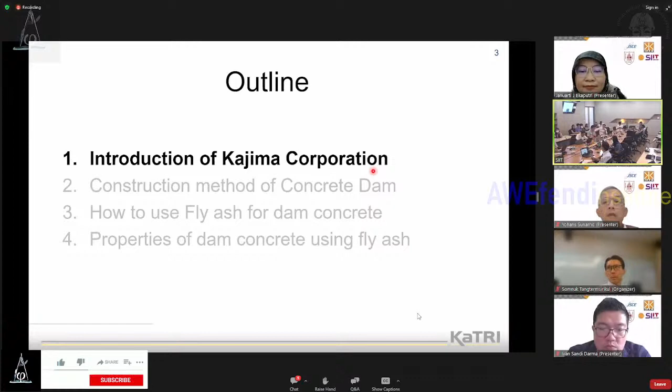So a brief introduction of Kajima Corporation: the headquarters of my company is in Tokyo, Japan. Just a moment. Can you see the slide? Anyone, please? No? Okay, that's okay. So my company... okay. So the headquarters of my company is Tokyo, Japan, and our business includes civil engineering construction division, construction, real estate development, design engineering, and so on.

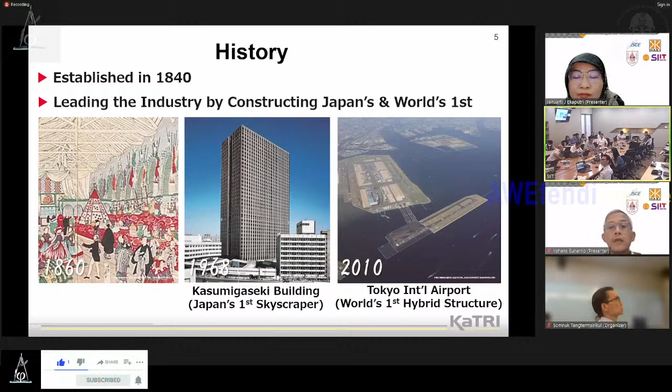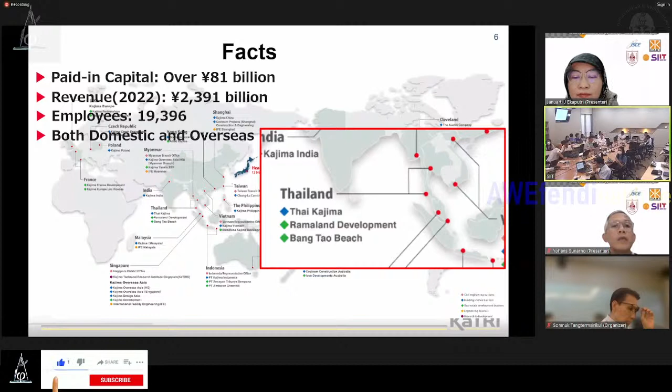This slide shows the history of my company. Kajima Corporation was established in 1840, and our mission is leading the industry through construction in Japan and at a world class level. Our paid capital and revenue are shown on this slide, and we have employees of almost 20,000 people, a number that includes both domestic and overseas staff. In Thailand, Thai Kajima is a group company of ours. Our company covers all phases of a project, not only construction, but from early planning and design to maintenance, all phases are our company's work.

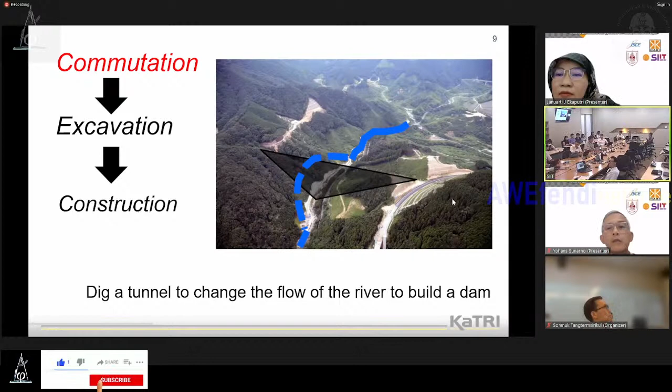Then, first I introduce the construction method of the concrete dam. This figure shows a dam construction site. I worked at that site, a dam construction site, for 3 years, doing quality control of the concrete. So the river flows along these lines, and the black triangle is the dam construction site. It is impossible to construct a dam in the riverbed, so we dig a tunnel first and change the flow of the river, and then we construct the dam site. This is called diversion. After diversion and excavation of the rocks, concrete construction is started.

At the dam, the concrete is separated into almost two areas. One is the outer part, durable concrete, which is cast because this area is the surface area, so compressive strength and durability are required. On the other hand, the inner part of the concrete does not require much compressive strength, so the most important thing is reducing heat generation.

For example, for big dams, RCD, roller compacted dam concrete, is used in Japan. For dams with a height over 50 meters, we use RCD concrete as the internal part of the dam concrete. The strength of this concrete is very hard.

The water cement ratio, or water binder ratio, is 65 to 80% almost, and the unit weight of binder is about 120 kilograms per cubic meter. So the dam RCD concrete is very hard.

We transport it by dump truck like this, then spread it with a bulldozer to almost 1 meter height at one layer. So many layers are spread in the dam concrete.

At my work site, my dam is about 100 meters in height, so 100 layers are spread in the concrete dam.

And then, how to use fly ash for dam concrete. As mentioned, this slide shows the quality standard of fly ash, the Japanese Industrial Standard JIS. The SiO2, moisture, loss, density, fineness, flow, and activity index - these target values are decided under this standard in Japan.

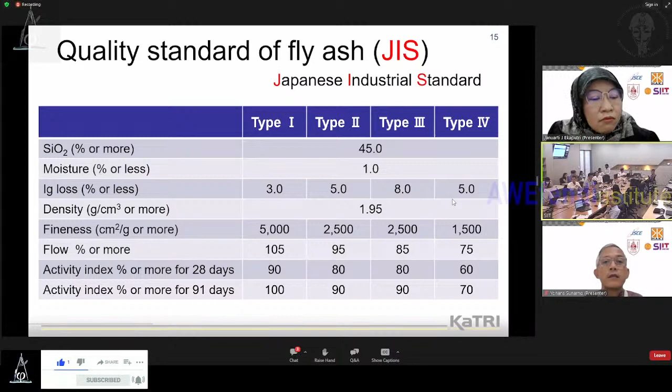Fly ash is separated into 4 types, and almost all dam concrete uses type 2 fly ash. In addition, most construction sites, beyond the JIS standard, have detailed rules for fly ash decided.

For example, this slide shows my experience at a dam site, such as the specification document for dam construction. For a specification document regarding fly ash quality, target values and allowable fluctuation ranges must be set for the following items, such as SiO2, loss, and fineness.

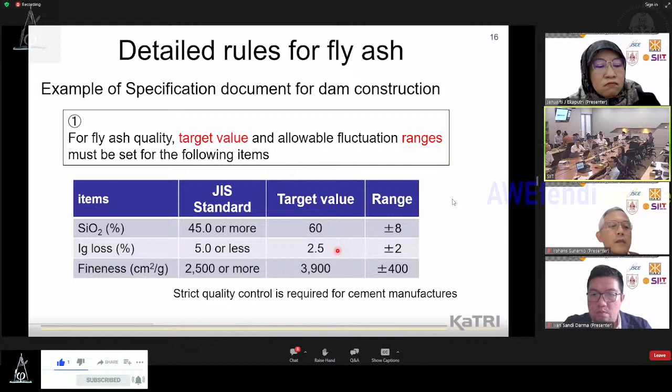The JIS standard value is here, but we are required to set the target value and the ranges. So it's very strict quality control required for our company, and also for a contractor or a cement manufacturer.

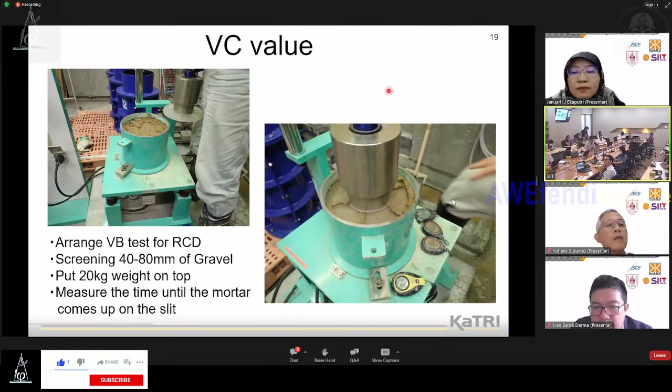This is the weight. We shake the lower table and measure the time until the mortar comes up to the slit. This is the VC value test. So we estimate the quality, the fresh property of the dam concrete, with these tests.

This slide shows comprehensive long-term compressive strength development of dam concrete. As many people researching fresh concrete know, this shows an explanation of number A and number B2.

These concretes are the same in maximum size of gravel, type of cement, slump, and air content. Only the water by binder ratio is changed.

We often estimate compressive strength at 91 days, and as you know, from 91 days the compressive strength increases for 2 years and more. And when the water by binder ratio is high, the increase is higher.

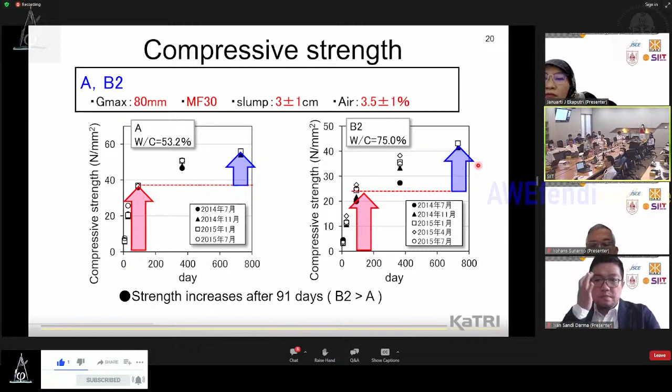So that is consideration. Compressive strength of dam concrete using fly ash increases over several years, but temperature rise of the concrete converges over 14 days. That is consideration. So we try to study about the real adiabatic temperature rise of dam concrete using this equipment.

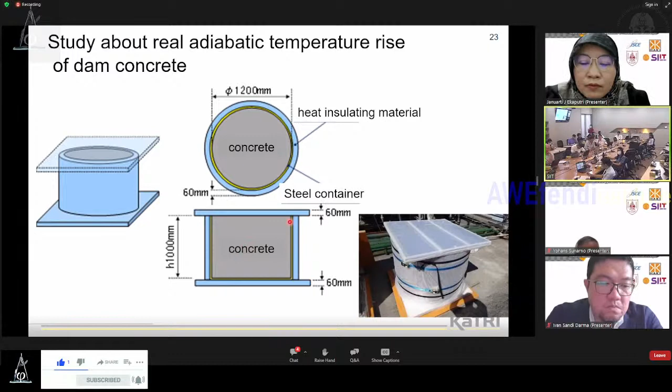The heat insulating materials, the steel container, and the concrete - we put the concrete and seal it and measure the inside concrete temperature, and then we try to simulate this equipment in the thermal analysis. We get this adiabatic temperature rise of fly ash concrete.

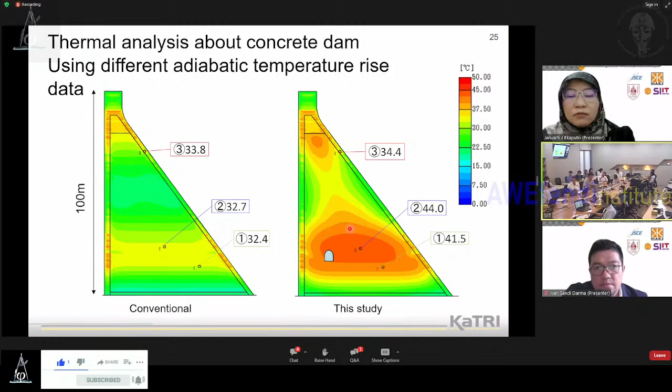The inspection gallery is here, and cracks I have never seen occurred at this area. That may be due to the low heat, but the construction speed is very high, so concrete is covered. Because of that, temperature is trapped inside, I think.

So that's the conclusion of my presentation. In Japan, fly ash is used under strictly controlled concrete dams, and the compressive strength of concrete using moderate heat fly ash cement increases over the long term. This is most likely known. But if construction speed increases and heat radiation is reduced, heat may accumulate in the dam. So I think so. That's the end of my presentation. Thank you for your attention.

Good afternoon everybody, thank you for the chance given to me to present my presentation. I am lucky today to represent the concrete industry from Indonesia and share in this forum.

I am from practitioner background. Now I am a director from PT Bosowa Beton, which is a ready mix and precast company from Indonesia. Bosowa is a national company, a subsidiary of Bosowa Corporation group, which has a large business in the eastern region of Indonesia. Our city is Makassar.

With our vision of becoming the best and largest ready mix and precast company in Eastern Indonesia, we will always provide the best product with excellent quality and service. Our commitment is to always innovate in developing high quality and environmentally friendly products, adhere to sustainability practice, and actively strive to reduce our impact on the environment.

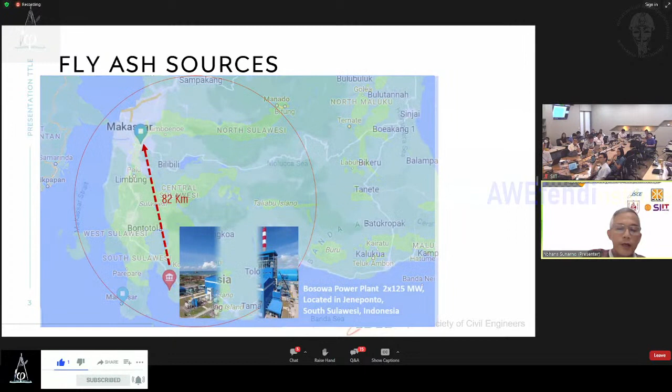First, we use fly ash for our concrete. That fly ash is sourced from the Jeneponto power plant in South Sulawesi, Indonesia, on Sulawesi Island. The power plant has a capacity of 2 times 125 megawatts, located in Jeneponto Regency, South Sulawesi, Indonesia, at a distance of about 82 kilometers from Makassar city, where our factory is located.

Now for the characteristics of fly ash. Based on the fly ash sample characterization from test data, there are several important mineral contents in fly ash that indicate the type or class of fly ash. From this characterization test, we can see that this class of fly ash is Class F, because the total of silicon dioxide, aluminum oxide, and iron trioxide is more than 70%. This is the classification we use for our factory in Makassar.

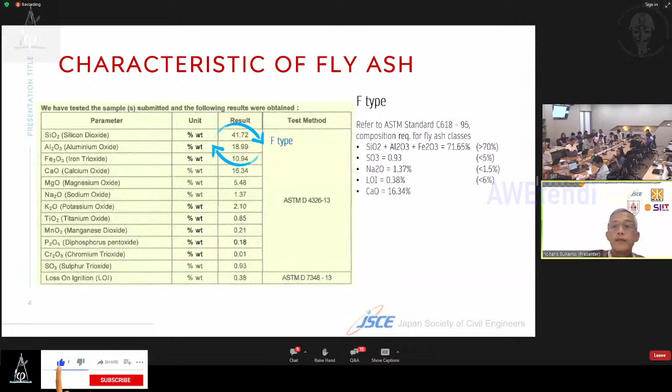We have already been using fly ash for about 10 years, starting with fly ash from this factory. So if we talk about the benefits of fly ash usage in the concrete industry, there are three aspects we can consider regarding the benefits of fly ash usage.

The first is the technical aspect. In technical terms, the following are the benefits of fly ash in concrete, both in fresh concrete and hardened concrete conditions. In the fresh concrete condition: improved workability, decreased bleeding, reduced segregation, and low heat of hydration. In the hardened concrete condition: improved strength and durability, permeability, corrosion resistance, and self-healing.

The second benefit can be seen from the economic aspect. We get the following benefits: first, we can reduce the cement cost. Cement is the largest component of the material cost of concrete production, so by utilizing fly ash as a supplementary cementitious material, where generally the price of fly ash is cheaper than the price of cement, the greater the percentage of fly ash used, the cheaper the cost of concrete material.

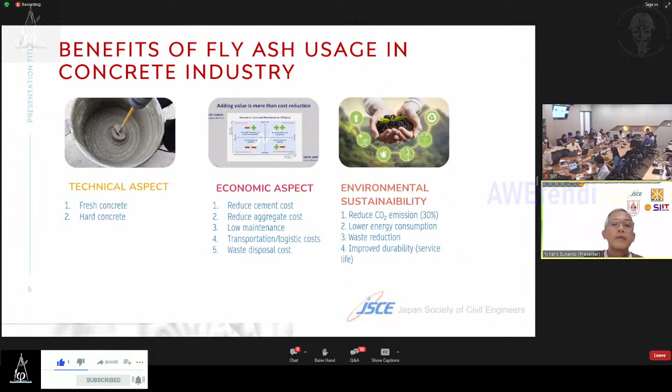So that's about the technical aspect. We have some advantages with the use of fly ash. The first is improved workability.

So it increases, as we can increase the slump result of fresh concrete. In our product, some concrete that uses high volume fly ash concrete behaves like self-compacting concrete. So the slump is very high. This makes it easy for casting the concrete on site.

Second, decrease bleeding and segregation. So the physical characteristic of fly ash can improve the cohesiveness of fresh concrete.

The third, increased compressive strength. Fly ash causes lower initial compressive strength in concrete up to 28 days. But after 28 days, the increase in compressive strength continues until more than 120 days.

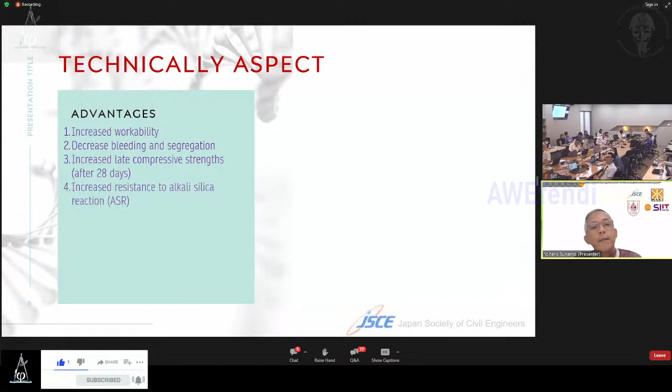The fourth, increased resistance to alkali silica reaction. Five, increased resistance to sulfate attack. So concrete with fly ash can anticipate conditions in a coastal area where the influence of seawater or sulfate attack can damage concrete performance.

6. Less heat generation during hydration. It's very helpful in mass pouring casting, where usually the thickness of the concrete is quite large, sometimes 1 or 1.5 meters. So in this condition, if there is a temperature difference, this can also be a problem, because in concrete, the hydration process increases the temperature of the concrete.

7, increasing pore refinement. And 8, decreased permeability. Fly ash particle size fills voids resulting in increased concrete density. So with fly ash usage, we can increase the density, so we can get concrete with higher density.

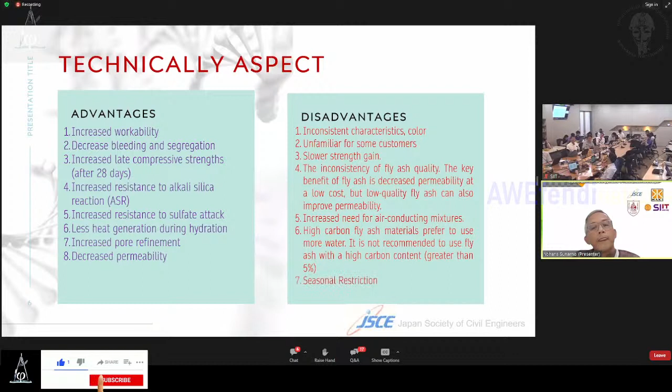In our current application now, we already use fly ash with a percentage of about 35 to 40%. So for retail projects, we always use fly ash content of about 35 to 40%, except if the project has special requirements.

The second application is for custom specification projects. Last year we had a project in our city with mass pouring of about 2,300 cubic meters. The name of the project is Sudirman Suite Tower. The pouring had to be finished within a maximum of 36 hours with grade FC 30 megapascal, and the temperature requirement was maximum 32 degrees Celsius. So in this concrete, we used fly ash at about 15%. And to minimize the temperature, we used ice, so the temperature stayed under control at less than 32 degrees Celsius.

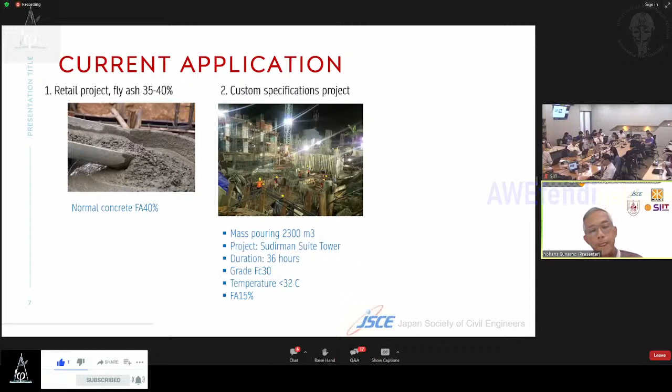In the next application, we now produce pre-stress piles that use high volume fly ash concrete. The pre-stress concrete grade is FC 45 megapascal, and it must be high early strength concrete because we need to release the steel cable before 24 hours.

Pre-stress production is limited by strength and time. Pre-stress concrete must reach a certain tensile strength so the steel cable can be released. The time required for release affects the speed of production. So when we use fly ash at about 50%, it causes the initial strength to be slow. In this condition, we do material engineering by adding a chemical admixture. For this product we use superplasticizer and an accelerator, because we have to reach a strength of 21 megapascal before 24 hours.

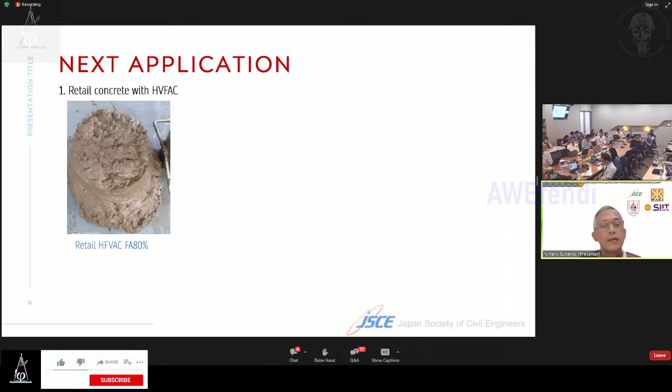Next, we are planning to produce railway sleepers with high volume fly ash concrete. We know the application of fly ash for rail sleepers has already been used in Australia and Japan with geopolymer products. In Indonesia, where the influence of the marine environment is very dominant, I think it's important to research the application of high volume fly ash concrete for rail sleepers. Our target is that next year we can already produce this product, the railway sleeper with high volume fly ash concrete.

The next item is cellular lightweight concrete with fly ash. We will try to use fly ash to replace cement, and we also use bottom ash to replace fine aggregate. With this product, we hope to get more efficiency and more cost savings on material cost.

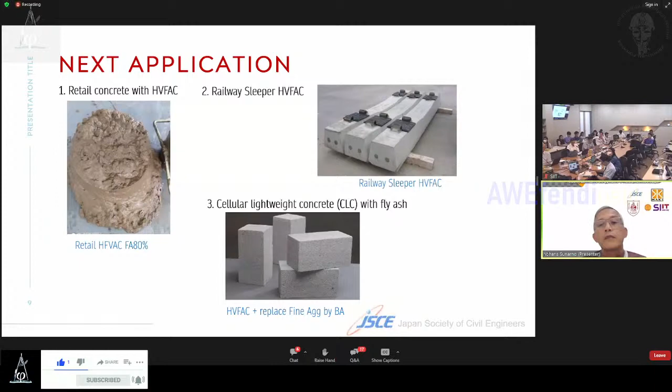So this is our summary: there are many opportunities for utilizing fly ash and bottom ash in Indonesia. Material engineering needs to be carried out so that quality requirements can be met. Proper handling of fly ash and bottom ash produces a concrete alternative with high performance, cheaper and environmentally friendly.

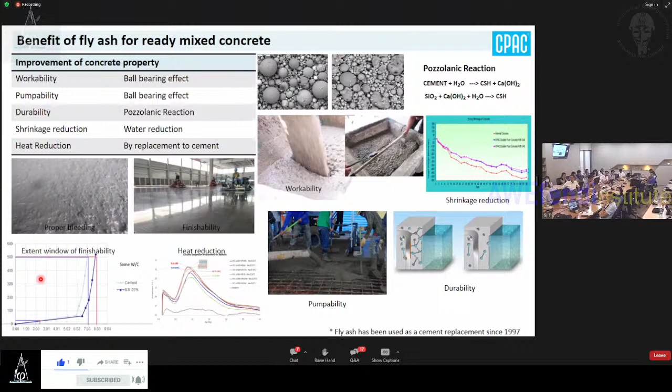For post tension, as I mentioned, in Thailand we use it for high-rise buildings, so we need some fly ash to give better quality pumpability of the concrete. And the bored pile, we prepare fly ash around 30 to 40%, even in underwater concrete work.

And if we talk about durable concrete, as I mentioned, for industrial floors we use around 20 to 25%. For sulfate resistance we use around 30 to 40%. For waterproof concrete as well, marine concrete, we use around 40 to 50%. For special cases like high strength concrete, self-compacting concrete, and low heat concrete, which today I'm going to give you some information on in detail, we use from 25% up to 60%.

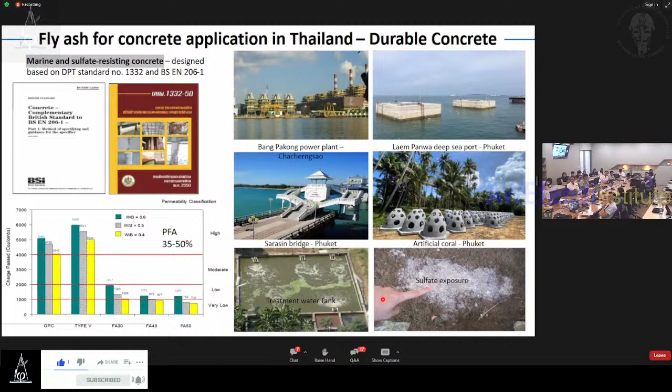Some water treatment tanks and some soil that have a sulfate condition. This is a benefit of fly ash for durability.

Also, as I mentioned, for floors and waterproof concrete, we found some effect from fly ash when the concrete cracks and is exposed to moisture in some moist environment. After that, it can heal itself when moisture comes to the structure. So that's the effect of fly ash as well.

So this one just wants to show you what applications we use. And for self-compacting concrete, it's used a lot in Thailand right now.

For thin shell structures like this, difficult for people to cast and difficult to vibrate the concrete, we use self-compacting concrete, even with congested reinforcement. This one is close to SIIT and Thammasat University, the expressway at Chiang Rak. I think Professor Smith was also involved in this project for casting self-compacting concrete.

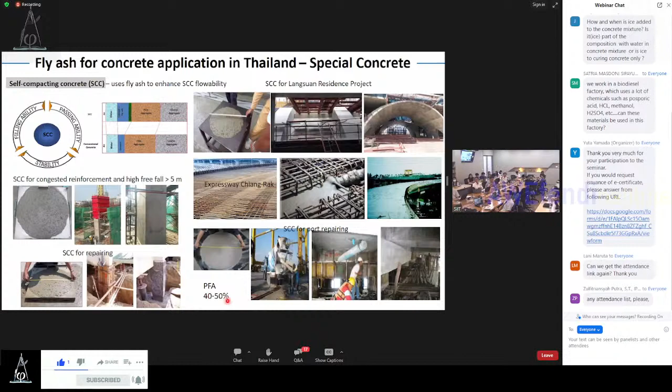And so on, many structures use fly ash for repairing. This one used around 40 to 50% to repair cement sheds, and it's used for high strength as well. I've seen it used for vertical members and also horizontal members like slabs.

We also tried to make a pump simulation for the concrete. You can see here the pump line, with a distance of about 600 meters. We pumped the concrete in and observed the concrete out with no problems when using fly ash like this. So there are many applications in Thailand where we use fly ash so far.

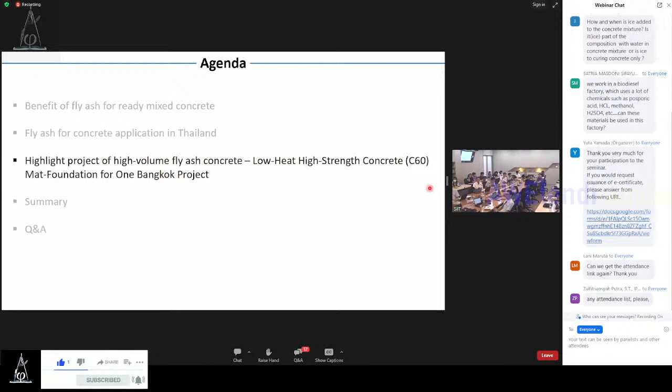Right now we generally use it for C60 high strength concrete in Thailand. Okay, this is some background of fly ash applications in Thailand, so this is the highlight I would like to give you information on, as I mentioned, we use fly ash for low heat concrete structures like mat foundations.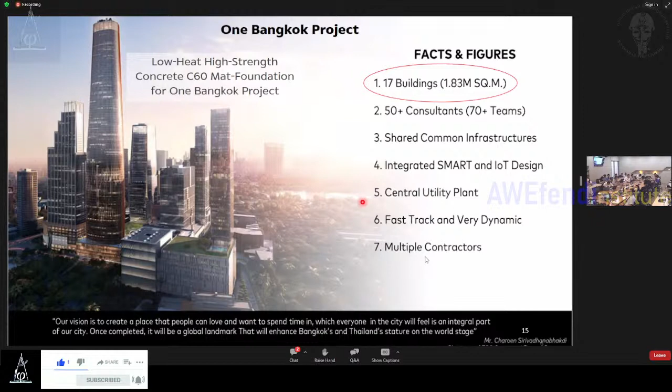The project is kind of a mixed-use and complex project. You can see the number of consultants here, and there are many contractors, many contracts in this kind of project. This is a very big one from our experience in Thailand, and you can see here a lot of mat foundations where concrete was cast.

But today the highlight is here, O4H4. If we cast concrete in one time and achieve that, it's going to break the record for the largest cast in Southeast Asia so far. This one requires, as I mentioned, C60, and we have to think about the low heat property of the concrete. So I will give you more detail.

Before doing that, when we started the meeting with all parties before the project began, for the mass concrete and kind of mat foundation like this, we had to concern ourselves with two items.

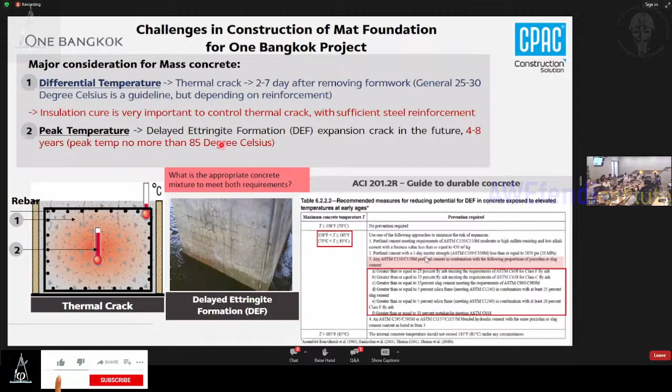This table summarizes what we talked about regarding the concrete property for the project. First of all, as I mentioned, we talked about C60 for the mat foundation, but in general we have to use high volume fly ash, so we cannot in general guarantee the compressive strength around 28 days.

But for this one, to achieve C60 at 28 days, I think it's impossible. So we talked about a 90 day guarantee strength from the concrete supplier. This doesn't matter for the construction sequence because the concrete can develop strength over time.

Once at 28 days, it's around 60%, so workers can continue their job. There's no effect from this. So this is the number we talked about.

And we would like to have high workability concrete because we cast a lot, you can imagine 28,000 cubic meters, we need high workability concrete and long working time, around 4 hours. The setting time we set around 12 to 14 hours.

The maximum temperature, as I mentioned, is 85 degrees. The fresh concrete temperature we control around 35 degrees Celsius. The max temperature differential at that time, we talk about 30 degrees Celsius in general, but in detail we have a model from Professor Somnik and SIIT to calculate the steel rebar to confirm the crack can be controlled.

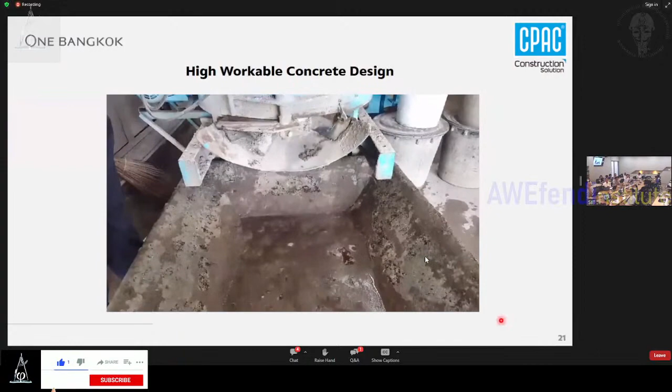You can see here the slump retention at 4 hours, and this is our lab test after we do it, you can have a look at this. We got the strength around 56 to 70 MPa. This one is in cube, but we can convert around 65 something around this. This is our lab, and we try to shrink it as well.

And we select the proper admixture to be used for the project. Rather than only the concrete material itself, we have to think about it, because the structural design, they design the steel bar from the structural point of view.

We closely work with SIIT and Professor Somnik to use the model to simulate the structure of the mass foundation for this one, because it's a new case. Everyone is concerned about the structure and about thermal cracking, because it has very high depth and also very high strength.

So for this, I got information from Professor Somnik. He has a lot of models, and the model is quite excellent, it covers all aspects. It includes the total heat generation from different kinds of material, the temperature of concrete prediction, the heat conductivity, heat transfer coefficient, combining all together, and even the environmental factor.

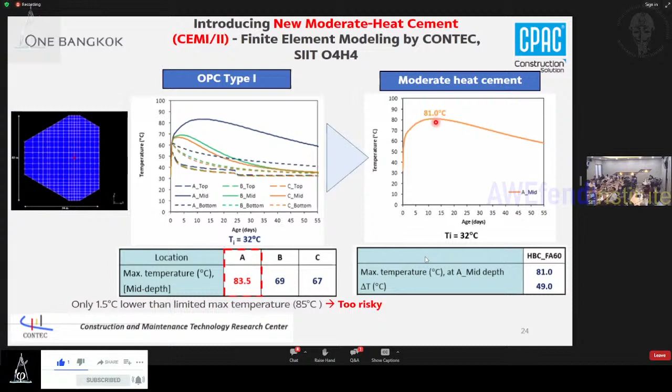After that we refine the model, and the SIIT team CONTEC deep down, analyze in detail of the structure, and they get the peak temp around 81, something like that I mentioned. And we found some area we need to put more rebar to control the crack, particularly at the edge of the structure.

This is some animation and some photo analysis from the SIIT model. And even after we changed the cement use, we tried to understand and make sure that when we change the cement type, it's going to work well alongside the model.

So we did some adiabatic tests at lab scale, comparing OPC cement, ordinary Portland cement, and moderate heat cement, and we got a number of the temperature reduction around 3 degrees Celsius. After that we were quite happy about this.

After that we moved to plant scale. We cast like a 1 cubic meter sample and compared the temperature peak again. We got the number again, 3 degrees Celsius, quite close to our lab test. So everyone was happy about this.

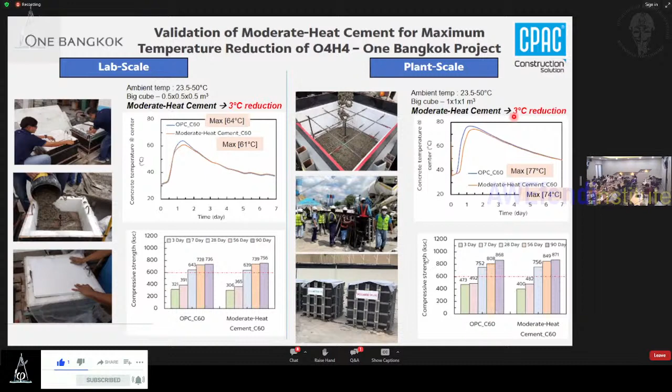So we went on and cast the concrete. You can see the number of trucks here, a lot of trucks, and we have pumps alongside the trucks. After they finished casting concrete, this one is the concrete look and the strength development of the concrete that we got.

It's quite happy for our issue. And after that we put the thermocouple to monitor the temperature at each point.

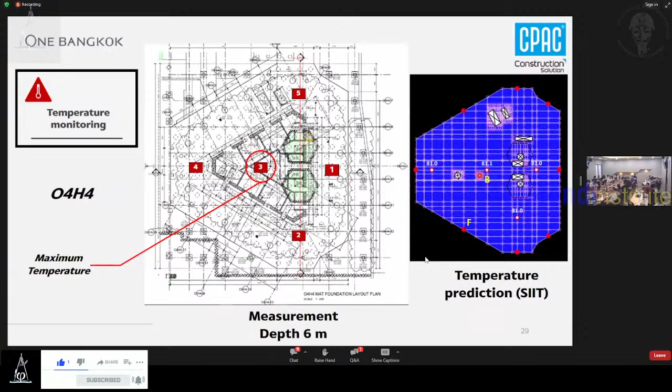We got the number here around 81.1, 81. We compare here the specified maximum temperature, and the red line is the middle temperature that we measured from the real structure. You can see maximum is around 81.1, and we predicted around 81 from SIIT. We also have our software to compare with the maximum temperature as well.

So the prediction and the actual are quite close, and everyone was happy about this number. The differential temperature you can see here is not much, around 18 degrees Celsius, something like that.

Summary: we have cast and achieved O4H4 for the mat foundation with 60 MPa. You can see the volume here, the number of plants that supplied the concrete, number of trucks, number of chutes.

We spent around 36.5 hours casting continuously, and the max rate of supply is around 1,400 to 1,500 cubic meters per hour, and average around 1,000, something like that. So it's our pride project here.

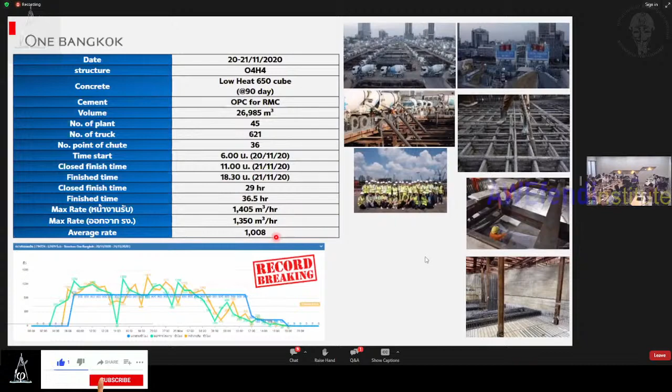This is after we observed, after casting, we found some actual cracks, but very few, so it's acceptable for our party.

Okay, before I end, I just have a short video to show you our project.

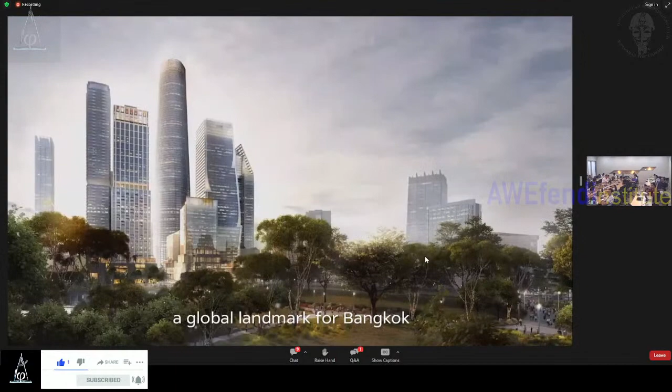Just so you can imagine what the concrete looked like when we cast at the top side. Skip some.

Some overview when we cast concrete. You can see the number of trucks and you can see the platform. This is the main contractor that we worked together with for casting.

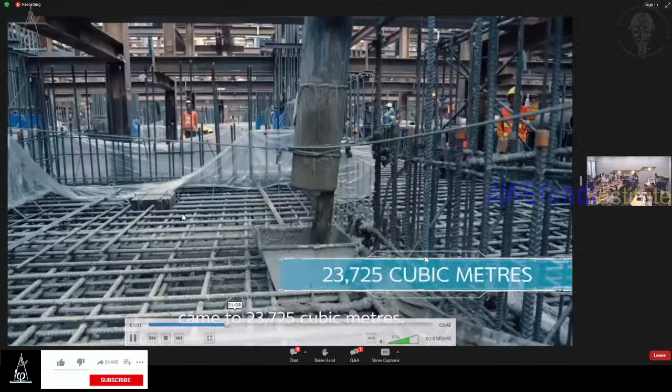Okay, you can see the concrete pumping, shooting together, and there are some boards showing in real time how much concrete has been cast.

Okay, this is the area, you can imagine it's quite a big area in the center of Thailand. And the challenging one, as I mentioned, is this has never been done before for the mat foundation.

A lot of people think it's only about the concrete material, but it's also about the supply of concrete, the planning, and how to place the concrete at the position.

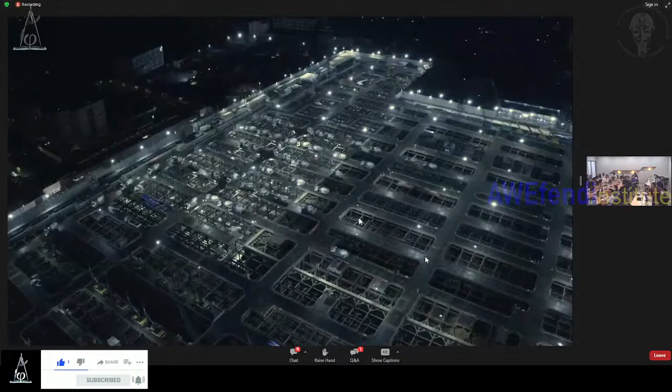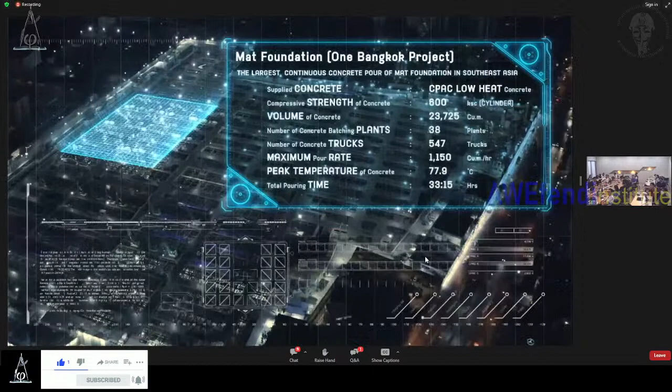Okay, this is actually not the highest one, but the previous one. The next one is higher, but we didn't make a video, though I already gave you a presentation. So that is my presentation today. I hope you enjoy this. Thank you very much.

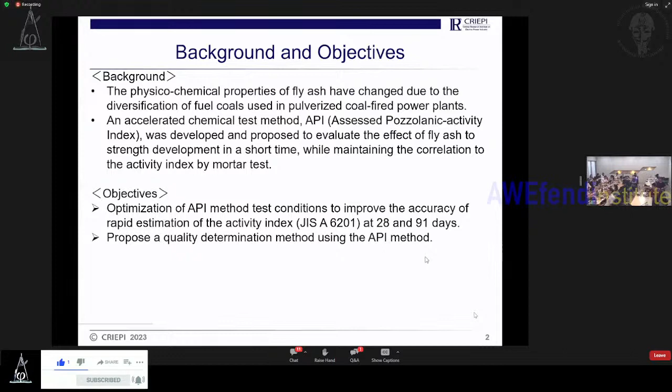There are already a few testing methods. Firstly, the Frattini pozzolanicity test. It uses cement suspensions made from 20 grams of powder samples: 20% pozzolanic material like fly ash, and 80% cement. The reacting condition is 40 degrees centigrade, kept for 15 days.

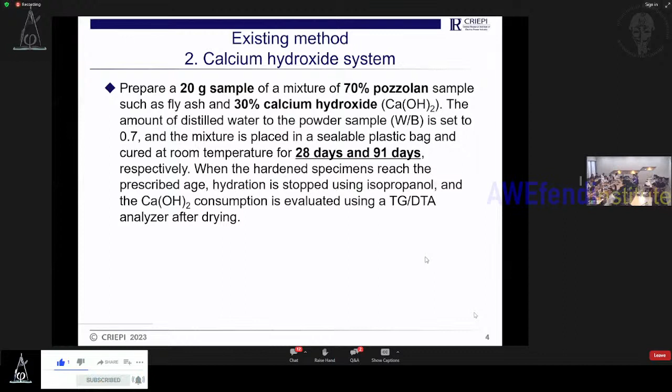The second method uses calcium hydroxide. We mix 20 grams of samples where 70% is pozzolan like fly ash and 30% is calcium hydroxide. This needs to cure for 28 days and 91 days for the paste specimens. After that, we determine the consumption amount of calcium hydroxide by TG-DTA.

The third one is the modified Chapelle test. This was used in France, I recall, and they use metakaolin as the concrete admixture reference, not fly ash. Metakaolin has much higher reactivity than fly ash.

In that case, they mix 1 gram of metakaolin and 2 grams of quicklime, meaning CaO as free lime, into 250 milliliters of pure water. The reacting condition is 85 degrees centigrade, kept for 16 hours, and we estimate the consumption rate of calcium ion.

By the way, my testing method, the API method, has a testing procedure like this. We use a small plastic container, with a sample amount of 2 grams of fly ash and 2.4 grams of cement. We use ordinary type one cement, and mix it with 80 milliliters of purified water. The reaction condition is 80 degrees centigrade, kept for 28 hours.

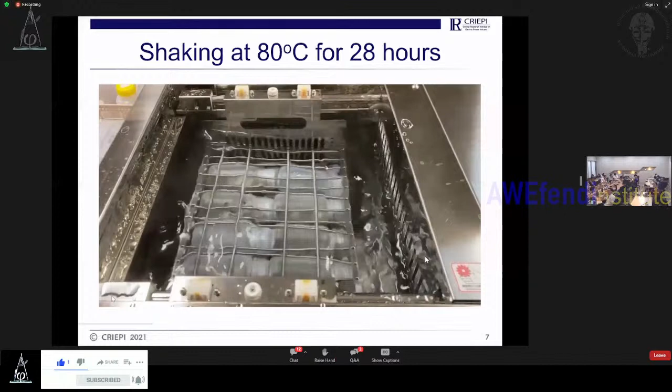I'll show you a small movie like this. We shake it in 80 degree hot water for 28 hours.

After that we get the data, firstly the difference. We must obtain the concentration of calcium in the reference data, obtained from the OPC system, and secondly we must get evaluation data from the cement and fly ash mix system, which is CA, F plus C. After that we calculate very simply, API equals this.

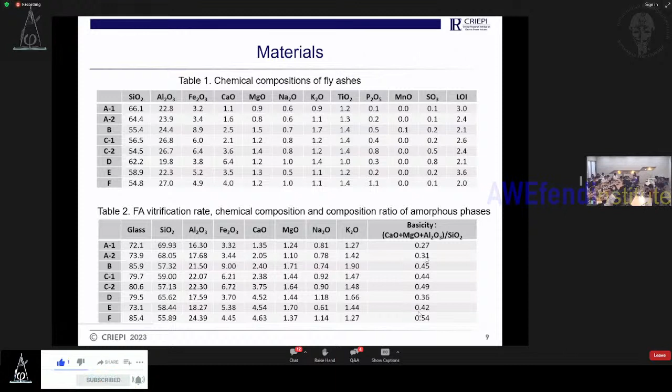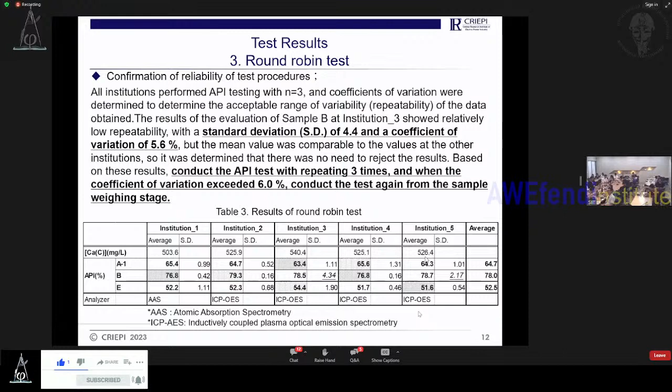So I decided to note in the Japan Industry Standard that after we conduct the API test, repeating it 3 times, if the coefficient of variation exceeds 6.0%, you must conduct the test again from the sample weighing.

And last, we must decide how to use the result of the API for the estimation of the activity index of the fly ash. The horizontal and vertical axes show the 28-day data from the mortar activity index. In the Japan Standard, JIS, there are 4 types of class, from 1 to 4. The lower limit for type 1 is a very high reactivity fly ash.

The lower limit is now 90%. For type 2 and type 3, the lower limit is now 80%. And for type 4, we must determine the lower level as 60% now. By the way, for the vertical axis, there's a linear relation, like those plotted points.

For type 1, the lower limit was determined as 80% in API. For type 2 and type 3, we determined the lower limit as 60%. And for type 4, we determined the lower limit as 45%, as shown here.

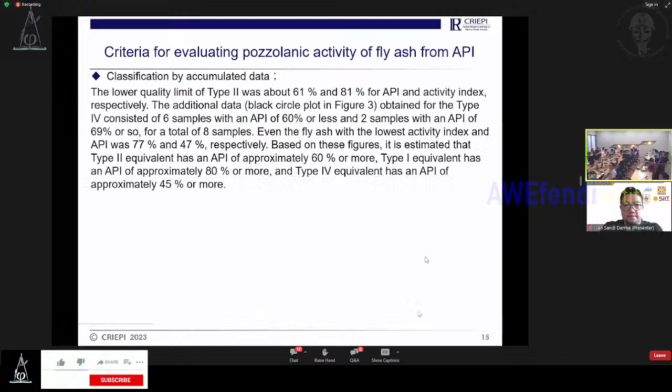And I show you the summary. Based on the experience gained from many years of research at CRIEPI and the results of the round-robin tests conducted by producers and users, it was clarified that the pozzolanic activity of fly ash can be appropriately evaluated by the API method, as well as the activity index by the mortar test. And it is proposed to newly include in JIS A 6201.

The criteria for judging pozzolanic activity of fly ash for concrete according to the API method are as follows. For type 1, the lower limit is 80%. For type 2, the lower limit is 60%, and also for type 3. And for type 4, the lower limitation is set as 45%. That's all my presentation. Thank you.

Okay, the background. First, the need to explore up to the microstructure level. Of course, when you add another cementitious material in the mix proportion, at least you have to explore or analyze not only the mechanical properties but also the microstructure level. And then from the microstructure level, we can also explore the durability from the viewpoint of pore structure. And in my presentation, I will try to introduce a cutting-edge technology by using computed tomography combined with several methods, and a new finding in order to contribute to the current understanding.

Okay, as you can see here, cement-based material is representative of a multi-phase heterogeneous material that is strongly affected by the characteristics of each constituent. Therefore, we need to understand the microstructural characteristics.

Up to now, we apply MIP, mercury intrusion porosimetry, X-ray diffraction, as mentioned by Januarti Senpai. Next, SEM, scanning electron microscopy, can be combined with BSE, backscatter electron, and then transmission electron microscopy, or TEM, nuclear magnetic resonance, or NMR, and finally X-ray computed tomography.

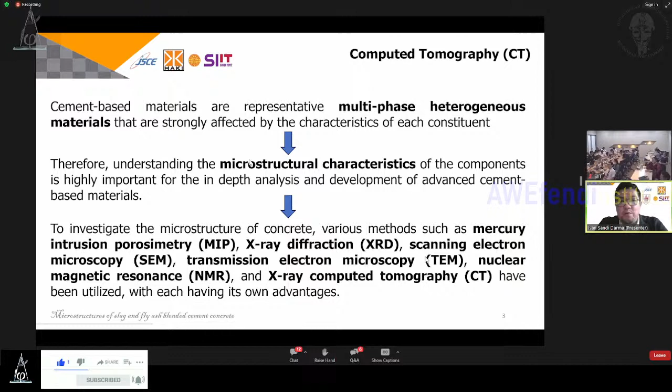For MIP, one of the most widely used techniques for determining pore size, but the drawback, as we know, is the bottleneck effect and also damage to the specimen during pressure loading. For XRD, the drawback: XRD is a non-destructive analytic technique, but it's only reliable when investigating crystalline compounds. For SEM, we know it's only 2 dimensional. NMR is quite difficult for investigating spatial characteristics. But for X-ray CT, up to now, there is still no reporting regarding the shortcomings of this method.

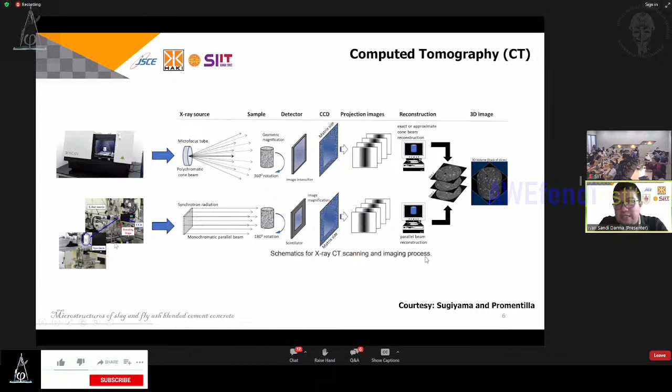In this presentation, I will try to share with you 2 types of X-ray CT. First, microfocus X-ray CT, and second, synchrotron X-ray CT. For microfocus X-ray CT, I used 2 types: first in Hokkaido University, and second in Bandung Institute of Technology. For synchrotron X-ray CT, we used synchrotron X-ray CT in Japan. The difference between microfocus X-ray CT and synchrotron X-ray CT is especially in the focal size.

In microfocus X-ray CT, the minimum focal size up to now is maybe around 10 micrometers, but for synchrotron, we could achieve 0.5 micrometers. So a very, very small size of the microstructure can be achieved by synchrotron X-ray CT. But again, the drawback, if you try to achieve a smaller voxel size, you have to prepare a smaller sample, and synchrotron X-ray CT is usually used for cement-based phases. But for microfocus X-ray CT, the cost is quite low compared to synchrotron X-ray CT.

In our recent research, we could achieve around 15 to 20 micrometer size, and the specimen could be cement paste, mortar, or maybe concrete. But again, in X-ray CT, not only the image, we could achieve many things. In X-ray CT, besides the image itself, we have a CT value, and for synchrotron X-ray CT, we have LAC, linear attenuation coefficient.

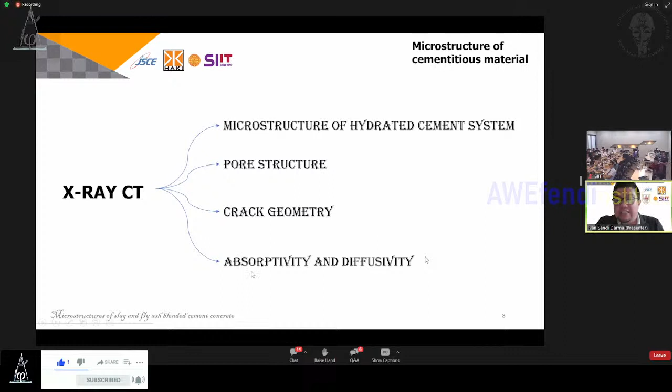So by using microfocus X-ray CT, we could find the difference, for example, before and after leaching test, before and after carbonation test, and before and after high temperature exposure. Here I try to explore the use of X-ray CT in four types of topics: first, microstructure itself, and then pore structure, crack geometry, absorptivity, and diffusivity.

For phase analysis or microstructure, here we use synchrotron X-ray CT in Japan. We use cement paste specimen at the cement paste level. We use OPC and low alkali cement. In low alkali cement, we use high volume of fly ash. Here, water to binder ratio is 0.5, and we cure the specimen from 2 up to 146 days. For the fly ash, we use type 2 JIS fly ash.

Here I show you this image, one slice from the X-ray CT. We have a bunch of slides, if I'm not mistaken around 2,000 slides, similar to bread. If you cut the bread, you will have the slice, and then if you try to merge the slices, you have a 3D, similar to this one. This is 2 days, then 7 days, 28 days, and 146 days.

This is from a similar specimen but a different sample. In here, you can choose ROI. What is ROI? ROI is a region of interest, the specific area you choose to evaluate. From the ROI, you collect it and create a new specimen, and you will achieve a VOI, volume of interest. You can imagine in the VOI you will have several slices, and then you merge them, and achieve a VOI.

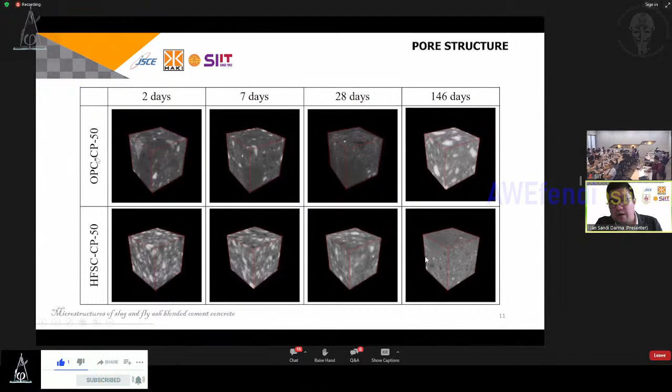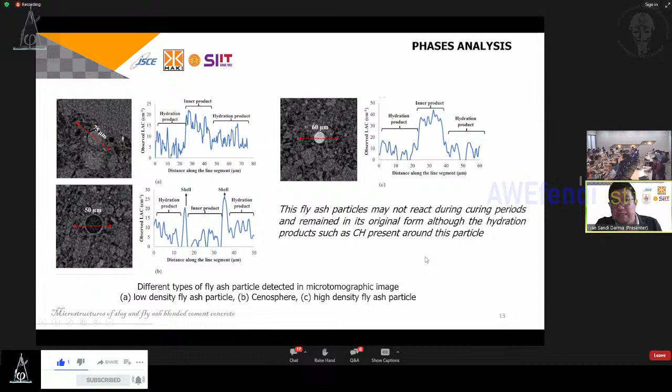Compared to the XRD, as several presenters said, by using SEM you can find the fly ash particle. In X-ray CT, you can differentiate several types of fly ash. Here we found a lower density of fly ash and a high density of fly ash. And finally, we will have a cenosphere, high density on the outer, and void in the inner. Later on, the void in the inner cenosphere, we call it cenosphere. There are cenosphere as well as plerosphere in the fly ash. This cenosphere may contribute to high porosity in the fly ash sample.

Here we try to evaluate more detail. We have percolated porosity and isolated porosity. Percolated means connected from surface to surface - from left to right, top to bottom, and side to side. That's the meaning of percolated. Isolated means isolated - it's not connected from one to another.

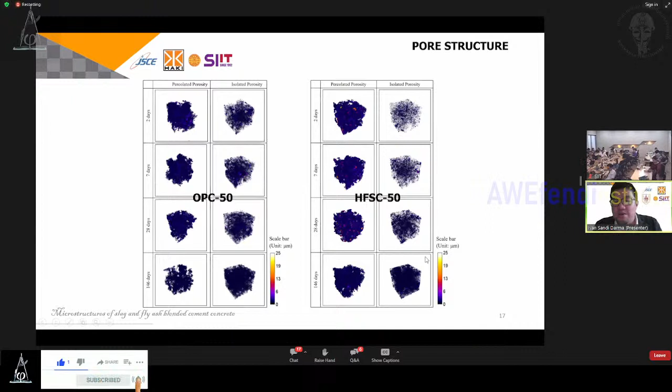Here the contribution, as I mentioned before, we have a cenosphere particle. The presence of fly ash particle in the form of cenosphere, which has a low density phase or void surrounded by high density thin shell, contributes to the amount of porosity in fly ash specimen. So maybe this is the answer why in some research we found that fly ash specimen has higher porosity compared to the OPC specimen. Maybe this is the answer.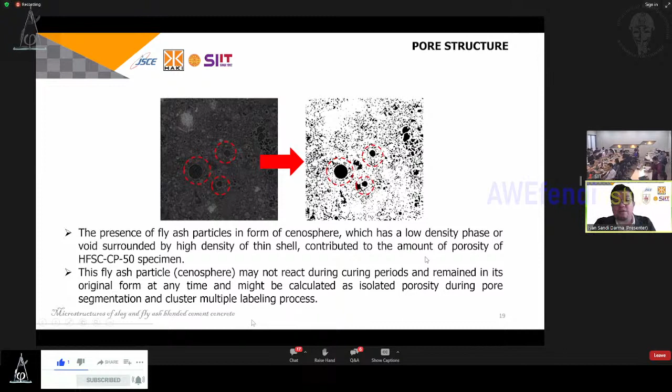We will have the cenosphere contribute to the porosity. This fly ash particle may not react during the curing period and remain in its original form at any time, and might be calculated as isolated porosity during the pore segmentation and cluster multiple labeling process.

For the crack geometry, again we prepare two types of specimen - one conventional OPC, and the second using fly ash. Two types of crack: first generated by flexural load, and the second generated by splitting tensile load. For the flexural specimen, we apply oven dry treatment, and for the splitting test we apply saturated condition. The specimen was immersed in water for at least 24 hours before the diffusion test. In this case we have absorptivity and diffusivity.

As you can see here, this is the crack geometry. We have 3 samples: first, OPC with lower crack opening width of 51 micrometer. Second, OPC with 152 micrometer. And the last, a fly ash specimen with 127. This is the image from 5 millimeter, 9 millimeter, 13 millimeter, and 17 millimeter from bottom to top.

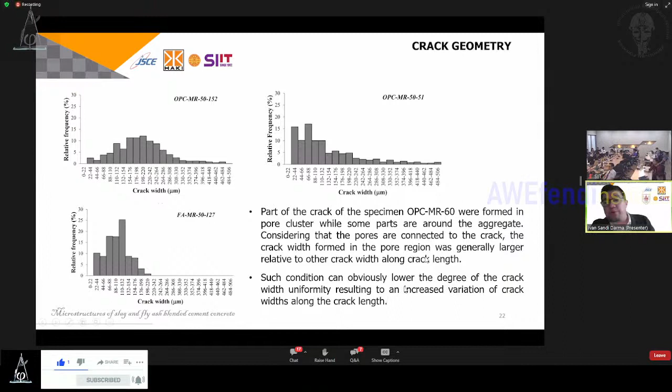For the flexural specimen, we also performed clustering and obtained the crack in 3D. As you can see, the tortuosity is quite low compared to the splitting specimen. So we can summarize that flexural cracks result in lower tortuosity compared to splitting specimens, and also higher constrictivity compared to the splitting test.

For the diffusivity test, as I said before, prior to conducting the diffusivity test, all specimens were immersed in water for at least 24 hours.

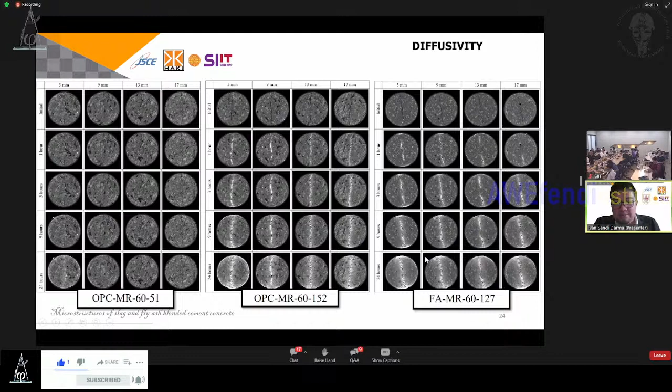This is thresholding. The observation of cross-sectional images of the splitting tensile crack specimen exposed to cesium shows that the tracer only fills the crack occupied with water. Thus, the immersion process for 24 hours before the cesium tracer diffusion test, unfortunately, did not produce a fully saturated crack, leaving behind air pockets.

In the next exposure time, the results showed there is no additional crack space filled by the tracer. In this way, the diffusion tracer only follows the path formed during the short period of exposure time.

And for the next, we also calculate the diffusivity along the crack. As you can see here, for OPC and fly ash specimens, the result shows an almost similar diffusion coefficient. So we can conclude the diffusion coefficient along the crack for every specimen is almost the same.

It depends on the liquid itself. So here, the diffusion coefficient along the crack is independent of the specimen, whether you use fly ash, slag, or only OPC.

And then for the last part of my presentation, the absorptivity test. This is from a flexural tensile specimen, where the crack was generated by flexural load. And then, as you can see here, for the OPC, the tracer spread out into the specimen, not only in the crack, but also in the uncracked matrix.

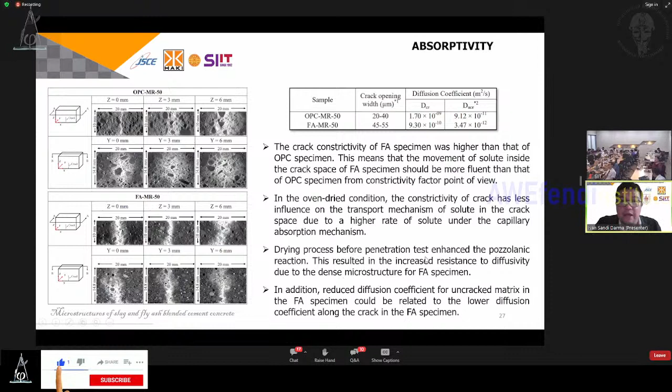And then, as a conclusion, the most important thing here is that it is highly expected that by using X-ray CT, the microstructure in cementitious material will be more explored in the near future.

X-ray CT again can be combined with other testing. You can combine it with diffusivity, permeability tests. You may check the change in the crack due to high temperature exposure and recuring, and apply any condition. Finally, using X-ray CT coupled with in-situ tracer diffusion tests would allow further understanding of the transport mechanism of diffusion in cracked cementitious material.

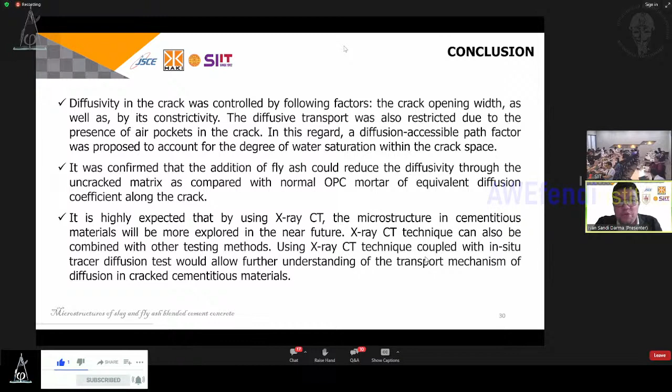And then for the bonus, recently we also conducted another test, not only using fly ash, but now we use SAP, super absorbent polymer.

Okay, and then for the last, this is... okay. Oh, wait a minute. Hey.

Superabsorbent polymer is a polymer able to absorb water up to 200 times its weight. First, superabsorbent polymer was used for diapers and farmland. In a soaked condition, superabsorbent polymer is potentially used as an internal curing medium. In this illustration, the superabsorbent polymer will release the water that was initially absorbed. Superabsorbent polymer has been researched massively in the last 3 years.

For mechanical properties of the specimen, compressive strength test is carried out at 1, 3, 7, and 28 days. On day 1, delayed hydration occurs, which can be attributed to the retention of water in SAP. However, starting from day 3, the compressive strength of the SAP specimen surpasses the non-SAP specimen. This increment can be attributed to internal curing from SAP, which is evidenced by the failure area of the specimen.

The crack surface for non-specimen was in the shape of a flake that resembled cement powder. Meanwhile, the SAP specimen revealed a typical surface of hardened concrete.

However, this study observed a 17% enhancement and overcome at early age in compressive strength for SAP specimen, while keeping key variables such as water content, water to cement ratio, workability, and compaction consistent.

Additionally, this study uncovered the phenomena of delayed hydration at day 1 to day 3, as evident by the compressive strength between days 1 and 3, which has yet to be explored in previous studies.

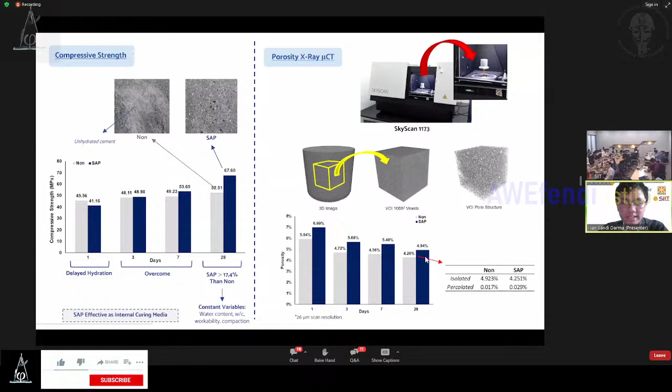Porosity of SAP at 28 days is slightly higher, but has some dominantly isolated pores, so the superabsorbent polymer can be assumed not to significantly influence it. Through two-dimensional pore evolution, we can tell that pores become isolated over time.

From X-ray CT, we can quantify pores in 3 dimensions. In non-specimens, significant change occurs from day 1 to day 3, but in SAP specimen, significant change occurs from day 3 to day 7. This indicates delayed hydration from water still inside the superabsorbent polymer.

We can also observe sphericity of specimen. SAP causes more elongated pores following the SAP structure.

To observe the durability, capillary absorption through crack will be tested. So the SAP specimen will be split and capillary suction tested using potassium iodide as a tracer for 24 hours.

Therefore, we can observe the penetration of tracer. Non-specimen penetrates almost 4 mm and SAP specimen just around 1.5 mm. This densification of capillary or gel pores confirms SAP as an internal curing medium and makes hydration more uniform.

Through X-ray CT, we can also observe crack geometry properties like distribution and connectivity. The distribution is similar, but maximum thickness from SAP specimen is attributed to pre-soaked SAP that becomes bigger when absorbing water.

And from the 3-dimensional crack space, connectivity can be quantified. SAP specimen has connectivity value closer to 1 than non-specimen, because uniform hydration makes more uniform crack width.

To prove the presence of SAP, we can scan the specimen with SAP that has absorbed some tracer, so SAP will be able to be identified. From the line profile, SAP shows up in the center of the pore.

SAP evolution can also be observed. The SAP will become smaller because of the release process.

In summary, we can say superabsorbent polymer is effective as an internal curing medium based on compressive strength and pore properties. Thank you.

That's our presentation. For the conclusion, you can imagine that the use of fly ash can be combined with superabsorbent polymer as internal curing, and then all of this can be explored or studied using microfocus X-ray CT. Thank you very much.